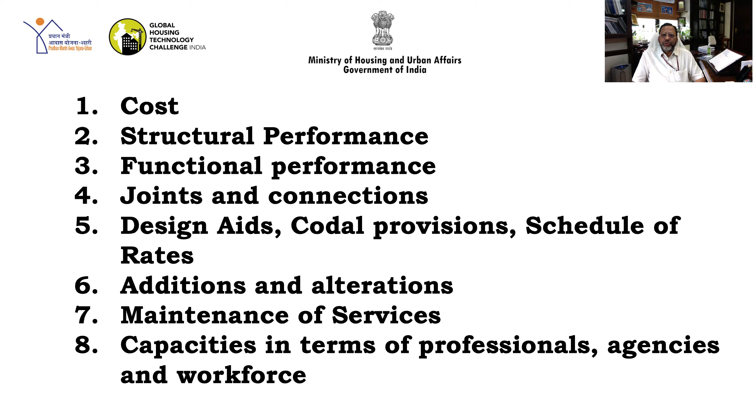Most of the queries when we interact with the stakeholders are broadly divided into these 8 areas, starting from cost to structural performance, functional performance, joints, connection, to the capacities in terms of professional agencies and workforce. So I have prepared one slide on each of them, and through those slides, I will try to answer the queries. So first and foremost is the cost, but before that, let me briefly give you

the project details. In Ranchi, we are using this precast concrete construction, 3D volumetric, where 1,008 houses are being constructed in G+8, which is 9-story, and the total project cost is 134 crore. And let me also tell you, this is the first time that this kind of 3D volumetric construction is being used at such a large scale in India.

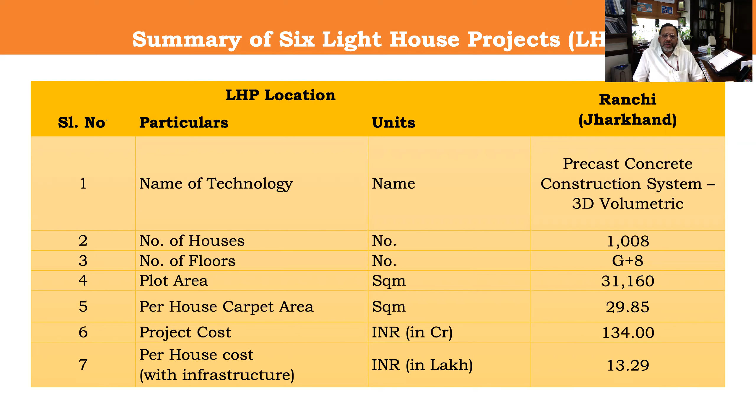So the first question is, what about the cost? If I compare the cost of the awarded project at LHP Ranchi, the per flat cost, including infrastructure, using this 3D volumetric construction is 13.29 lakh as compared to 11.83 lakh with conventional technologies. This is 12% higher. And why is it coming higher? Because, as I told you, for the first time we are using this 3D volumetric construction in India. So that is one thing.

In addition to this, there are a couple of other factors which have direct implication on the cost. These factors are: the size of the project, your location, the geoclimatic profile of the region, which includes wind velocity, earthquake, flood, and other natural and man-made hazards. The soil strata is also very important, because that will decide the type of your foundation. And then availability of material and factory.

Most of these innovative construction systems are based on a factory setup. So if you have a factory setup in the vicinity, then cost will definitely come down. Otherwise, you have to set up a casting yard, and the cost of that casting yard will be loaded on the cost of your project.

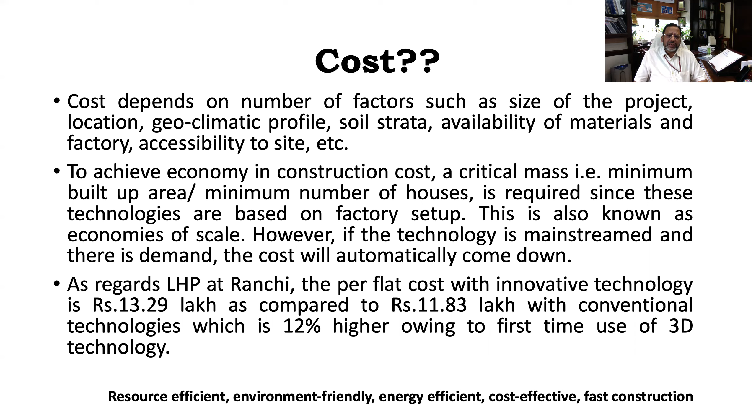So initial costs may be slightly higher, but overall, over the lifespan of the building and in terms of environment, energy consumption, economy, and optimization of materials, the cost is much less compared to the conventional constructions which are in vogue. Next is the structural performance.

So here I would say without hesitation that the performance is quite superior, because majority of work, if I have to say 90% of the construction, is taking place in the factory. And so here we can say we are not constructing the building, we are manufacturing the building, because the entire construction operation is taking place in a factory.

In a highly controlled condition, each component is being cast properly, each joint is being cast properly, and services are being put properly. It's like going to an automobile industry where you put parts of the automobile one by one, and at the end you get the car made. In a similar fashion, here the building is being made. You are putting components of the building one by one, and at the end you get the entire building.

So this kind of factory-made manufacturing of buildings under strict quality control and supervision ensures superior structural performance as compared to conventional cast in situ RCC construction. Further, because it's a concrete construction, we are using high performance concrete. There is proper reinforcement, and that reinforcement is detailed properly. There is accelerated curing through autoclaving. Then there is proper cover, and dimensional accuracy further adds to better structural performance.

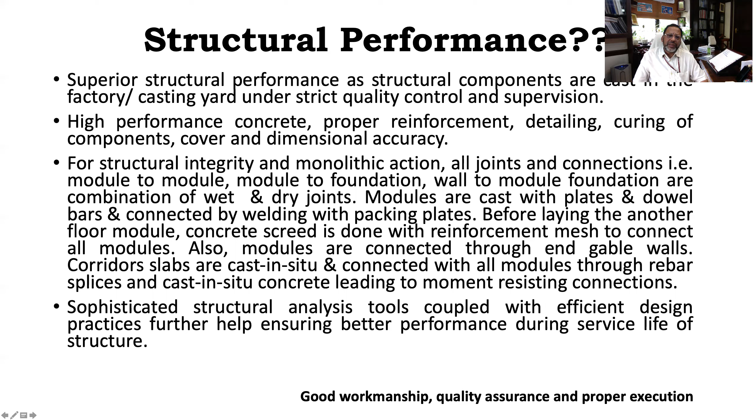Also, nowadays sophisticated structural analysis tools are available along with efficient design, which will further help ensure better structural performance. Also, remember that bad execution will lead to poor structural performance. So proper execution with good workmanship and strict quality control and assurance measures will further help improve your structural performance, like in any other construction.

Precast concrete construction is always thin because you're using high performance concrete. So the thickness of walls and structural elements is less as compared to conventional construction. So questions are being raised on thermal efficiency, fire rating, durability, etc. So let me tell you that because we are using high performance concrete here, and it's a precast concrete element, it's dense, it is impermeable, and it is high performance, so it helps in improving thermal efficiency.

But at the same time, because it is a concrete construction, you need to have some passive measures, including proper orientation, ventilation, doors and windows, including climate responsive design, which will help improve thermal efficiency. Also, for fire rating, you need to comply with national and international standards, and based on those standards, the thickness and reinforcement can be decided so as to have a desired fire rating depending upon the purpose for which the building is being used.

Construction is being done in the factory, so there is strict top class quality control as regards concrete. So these structures are durable, and there are almost no joints here because the entire 3D module is being made in the factory. So these are durable and require less maintenance. Compatibility with conventional finishing items is there because all doors, windows, tiles, your plumbing line services can be fixed in the factory. And so what you get is a pre-finished module from the factory, and all you have to do is connect them together and start using them as a building. Life cycle cost is low. I'd like to tell you something about life cycle cost.

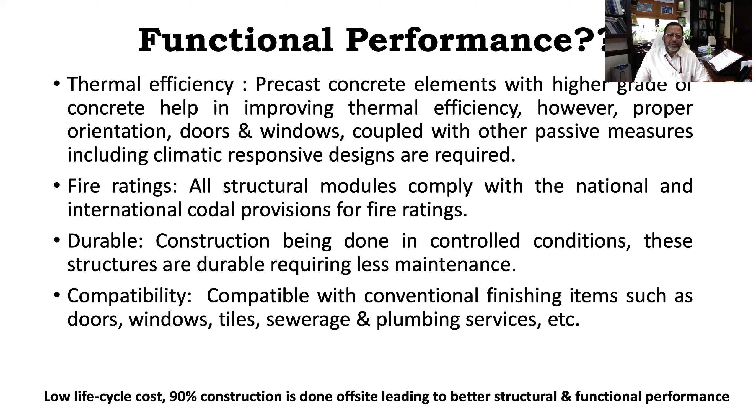Also, 90% of construction being done in the casting yard or offsite or in the factory will definitely lead to better structural and functional performance, and there is optimization of material leading to better functional performance. Joint and connections, as I told you, any kind of joint and connection is possible here. You can have dry joint, you can have wet joint, you can have mechanical joint.

So the technology providers, depending upon their technology, are using all these kinds of joints, and they also use a combination of these joints, because India is a seismically prone country. So depending upon the zoning, depending upon the loads you are getting, you can have combination of these joints. So normally there are three types of joints.

One is a dry joint, where you fix up plates with dowel bars in the modules which are cast in the factory, and these modules are bolted together through nut and bolts, or welded together with the packing plates. That is one kind of joint. Another kind of joint is where you can leave dowel bars in all the modules, and then connect these modules through grouts and through welding of those dowel bars.

Another joint is where you leave some walls open in these modules, and then cast those walls separately and connect all the modules together through that wall. Another connection kind is where, once you lay all the modules, all the modules are connected at the roof level with a separately partially precast roof, and laying over a screed with reinforcement.

So any kind of joint is possible, and the overall objective or purpose of these joints and connections is to have monolithic action and structural integrity. So in 3D volumetric construction, structural integrity and monolithicity of the entire structure is possible by properly doing joints and connection design. Okay, and another thing I want to tell here, that wet jointing is better, because dry connections are suitable for panel walls and floor systems. So a mix of dry joint and wet joint would be better for 3D volumetric construction.

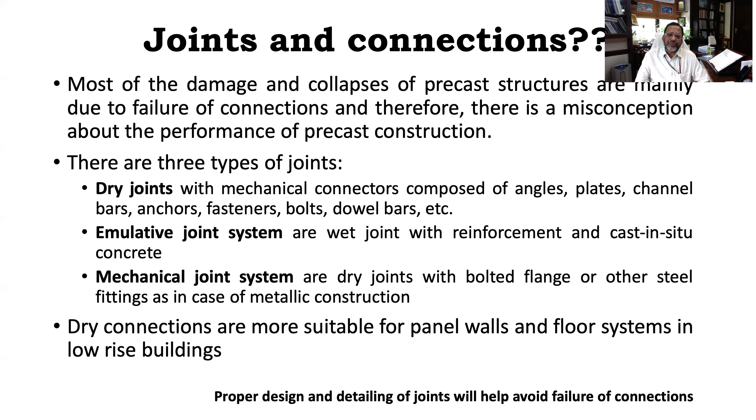So detailing of joints is also very important when we deal with these kinds of systems, and proper design and detailing will further help avoid brittle failure of connections in case of an earthquake or any other load. 3D volumetric construction comes under precast concrete construction.

So recently we have two codes on prefabricated concrete construction, which are IS 15916:2010 and IS 15917. The first code gives you building design, how to erect and how to design your building using prefabricated concrete, and 15917 is for mixed or composite construction, when you are using RCC and walls of different kinds. So these two codes deal with precast concrete construction.

In addition, we have the National Building Code 2016 as well, which mentions 3D volumetric construction. But as such, there is no dedicated code on 3D volumetric precast concrete construction. So we need to refer to international standards; the American ACI codes or Eurocodes can also be referred. And BIS, the Bureau of Indian Standards, does allow referring to these international standards in case of non-availability of an Indian standard.

Also, the BMTPC issues performance appraisal certificates for 3D volumetric construction. We have so far not issued any certificate for 3D, but for 2D precast concrete construction, the BMTPC has also issued performance appraisals. Also, this technology has already been shortlisted by our ministry, the Ministry of Housing and Urban Affairs, and it is one of the technologies of the Global Housing Technology. CPWD also has recommended this technology for future construction work.

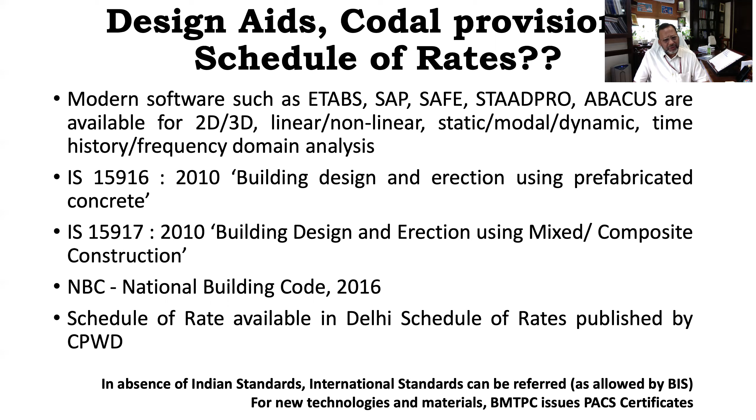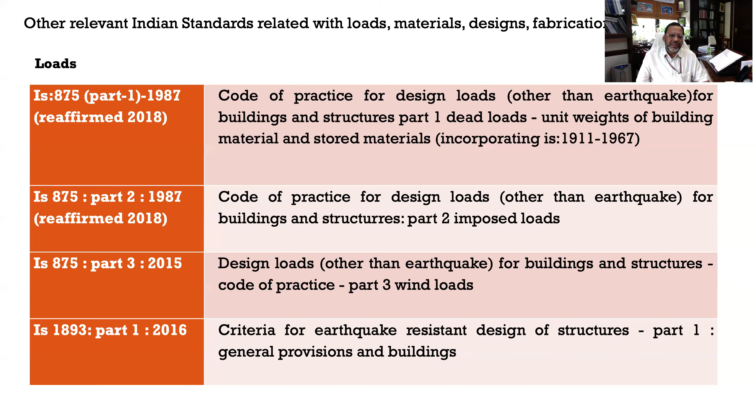And because it is primarily concrete construction, you can use these codes for load calculations. IS 1893 is for earthquake, and IS 875 for loads other than earthquake load. Then for RCC, the National Building Code 2016, which is a compilation of all the codes, can be referred, and the Bible for RCC construction is IS 456, which deals with mix design, fire rating, reinforcement details, and all those kinds of things. There is another very important code, IS 1786, which is the code for steel bars. So that needs to be referred.

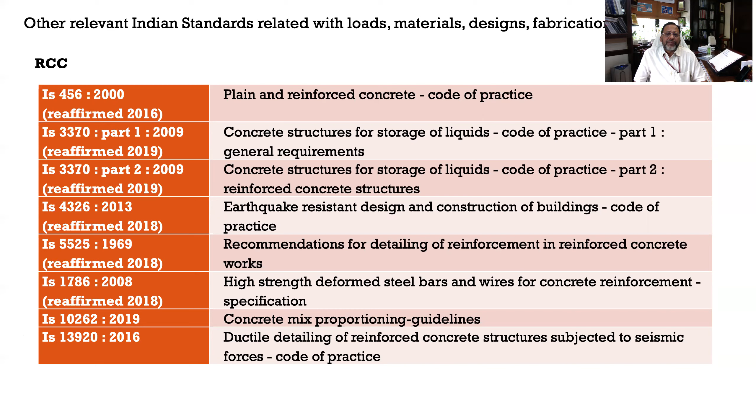And because we are using high performance concrete, IS 10262 is also very important to be referred for concrete mix design. And IS 13920 is for ductile detailing. This also is a must-have code, because when we are doing construction in zone 4, zone 5, or for that matter in any zone, the ductile detailing code needs to be referred time and again for proper design and detailing of your reinforced concrete.

Okay, so for the foundation, here again we are using a conventional foundation. Normally it is a footing; normally it is done on a raft. So for a raft, IS 2950 is the code. Otherwise, for shallow foundations or deep foundations, we have separate codes which are also written here.

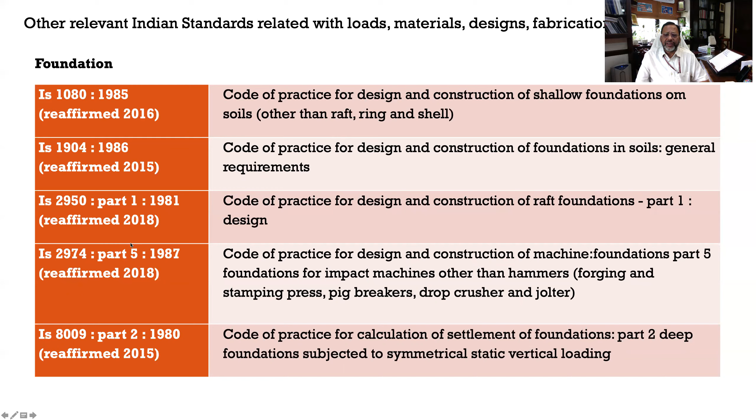Additions and alterations: here you can't do any addition or alteration at a later stage because, as you know, the building is manufactured in the factory, and at a later stage, if you want to do any addition, you have to cut through the concrete which is already laid. So it's very difficult. But if it is required, you have to do it with the help of the technology provider, with the help of an expert. And let me tell you, these additions and alterations will be very expensive and time consuming.

Okay, and also these additions and alterations at a later stage will directly affect your joint design and your structural performance, because here everything is decided beforehand, all connections and all those things. So doing it at a later stage is not advisable. So it is difficult to do additions and alterations.

Also, from my experience, let me tell you that particularly in concrete structures, with any additions and alterations made without giving proper thought, without referring to the original drawings and doing the analysis and design, these buildings perform very poorly during earthquakes. And it was found during the Bhuj earthquake that most of the buildings which were later modified didn't perform well.

And the obvious reasons are that you are changing the load paths of your building, you are making connections improperly, and there will not be any structural integrity and monolithicity between what was done originally and what was added later. So the connection between the addition you are making and the old concrete is also difficult to do if you don't seek the help of experts. So once you don't connect the old portion with the new portion, there will be an absence of structural integrity, and all these things will lead to failure of your building in the event of lateral loads.

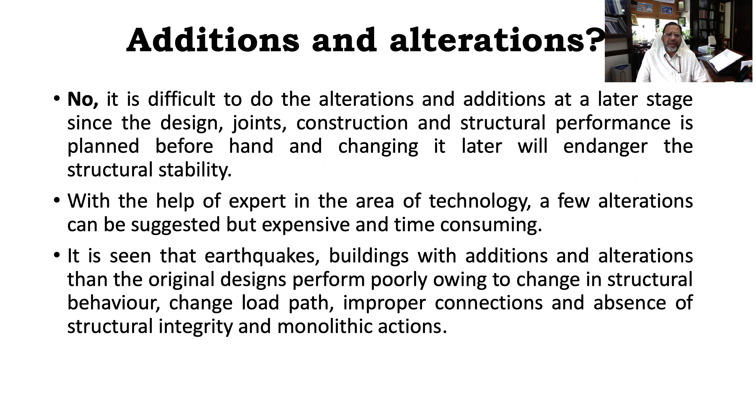Maintenance of services, yes, again, very difficult to do it here because you are doing the services in the factory, but in case of any leakage and malfunctioning at a later stage, you have to refer the manual, and you have to do it through a standard operating procedure, which is normally given by the technology provider.

But at the same time, it is recommended that we do the regular preventive maintenance of our building, which includes checking of lines, conduits, cleaning of clogged drains before the onset of monsoon. Then water flow, if there is any leakage, that needs to be immediately attended to. So regular preventive maintenance is required for this kind of factory-made construction.

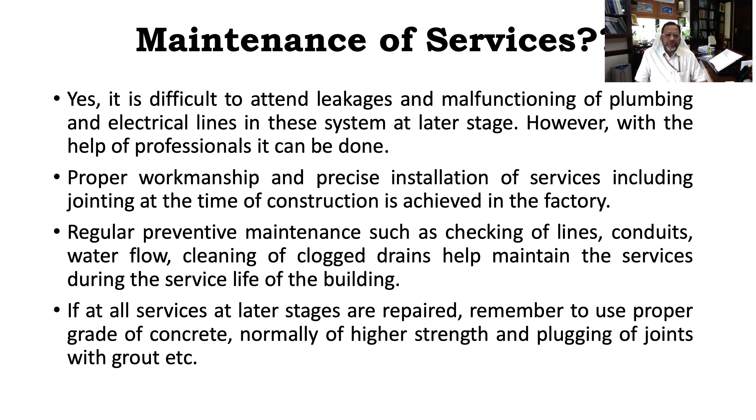And also we need to follow a standard operating procedure, which is normally given by the technology provider in case of any leakage or malfunctioning of your services. But it is difficult to repair. Also remember that whenever we are doing any repair, the grade of concrete is also very important. So repair work has to be done with a concrete of higher strength, and plugging of joints with high performance concrete and a specially made mortar is also necessary, so as to have structural integral action.

Capacities, yeah, there are very few companies. There are very few companies, which can be counted on fingers, who are dealing with this kind of technologies at present in India. But with the clarion call given by Honorable Prime Minister of Atmanirbhar Bharat and Make in India, there are more and more entrepreneurs, new entrants, startup industries joining the construction sector, and even youngsters. There are a few youngsters who, just by passing out from the colleges, are joining this 3D volumetric construction. I know a couple of them.

And in times to come, we will have enough agencies who will execute these large scale projects, and there will be a healthy competition. As regards capacities amongst professionals for designing and supervising these projects, yes, very few professionals exist at the moment, but concerted efforts are being made at the government level. We are also running a course NAVARITIH along with the School of Planning and Architecture, through which we are trying to inculcate knowledge about these new innovative construction systems in the professionals.

Also, this e-module for Technograhi is targeted to create a widespread awareness and sensitization amongst Technograhis, so that they can get the feeling of these technologies, know the various nuances of these technologies, and later on implement them in the field.